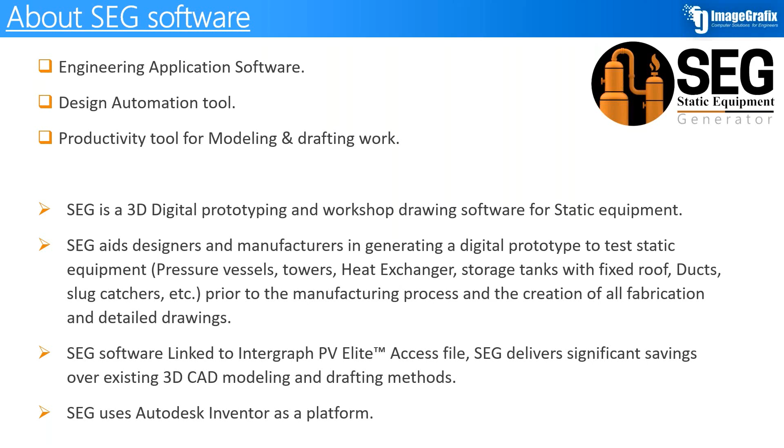By using SEG software, you have the ability to create many different types of equipment, like horizontal, sloped and vertical pressure vessels, columns with multiple sections and different diameters, storage tanks with a fixed roof, TEMA heat exchangers, piping, ducts, and slug catchers.

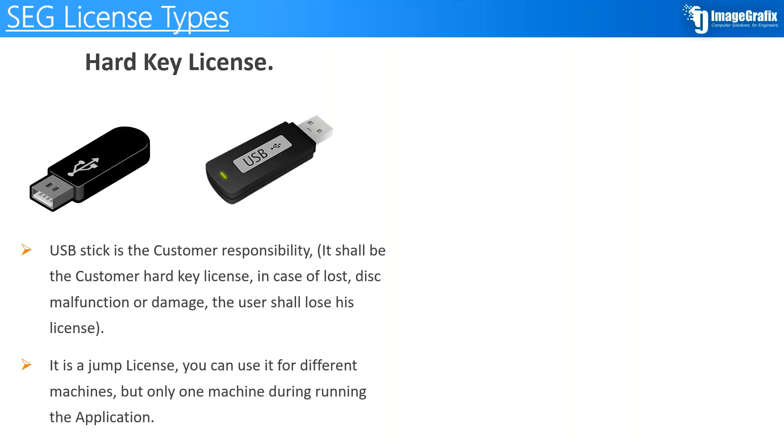SEG license types. SEG license is available in 2 types. The first type is the hard key license. By using a USB stick, you will connect it to your machine and you will be able to run SEG software. The advantage of this type of license is that it's a jump license. So that means you can move it from one machine to another, but only one machine while running the SEG application.

The second type of license is the internet license. In this type of license, the user should be connected to the internet all the time while running SEG software. It depends on the machine and some information of the user, like username and password. This type of license is a standalone license. You cannot move it from one machine to another unless you send a request to change the machine.

Today's topic: we will discuss some important points regarding the advanced assembly, or the project assembly, for multi-vessels. And for this demo, we will create a stacked heat exchanger and create a general arrangement drawing with multi-sheets for this stacked heat exchanger.

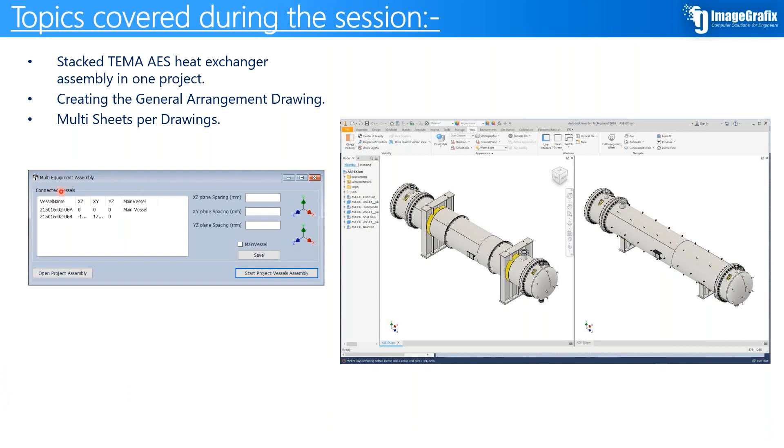By using this tool, which is the project assembly, we will make the assembly for both of those heat exchangers. And we will know how to specify the spacing between the main planes of the project to get the final assembly of both heat exchangers automatically. After that, we will proceed to create the general arrangement drawing with multi-sheets. Okay, so you have the ability to generate a drawing with multi-sheets.

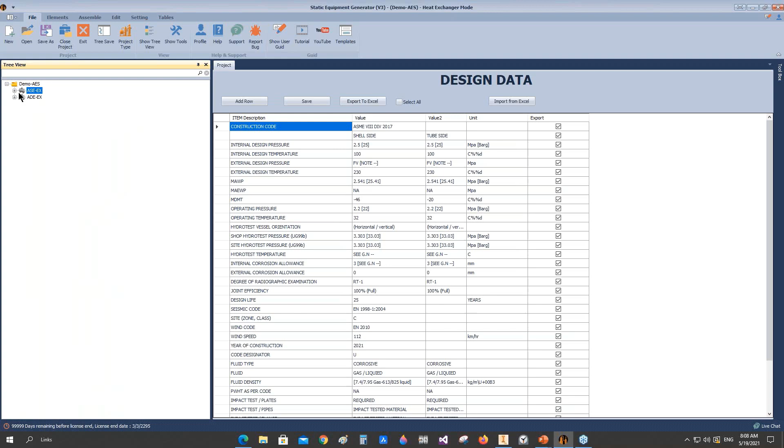Let's open SEG Software. And here you can see that in this project we have two pressure vessels, or two heat exchangers. The first one, as you can see, includes front end, tube bundle, shell side, and rear end. The second heat exchanger includes the same. Now, if we open Autodesk Inventor here, you can see that we have two separate heat exchangers. Each one of those is created by SEG Software.

And if we take a section view here of this exchanger, you can see that all details appear here, like the internal impingement baffle, tubes, tube sheet holes, pass partition, all of that.

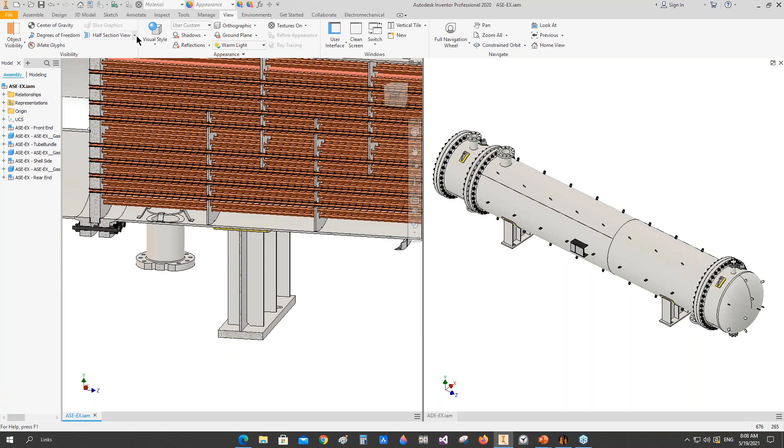Okay, now we will make the main assembly for both of those exchangers. So from the project node, here we have three different nodes. The first level is the project level. After that, the equipment level. And each equipment of those includes other nodes for each element.

Now we will select the project node, and by right-clicking on this node, we will get this shortcut menu. From it, we will select project assembly. Now we have this form for project assembly. This form gives you the ability to create an assembly for your project equipment. The first equipment here, which is mentioned on the tree, we will define it as the main vessel. After that, we will save the information.

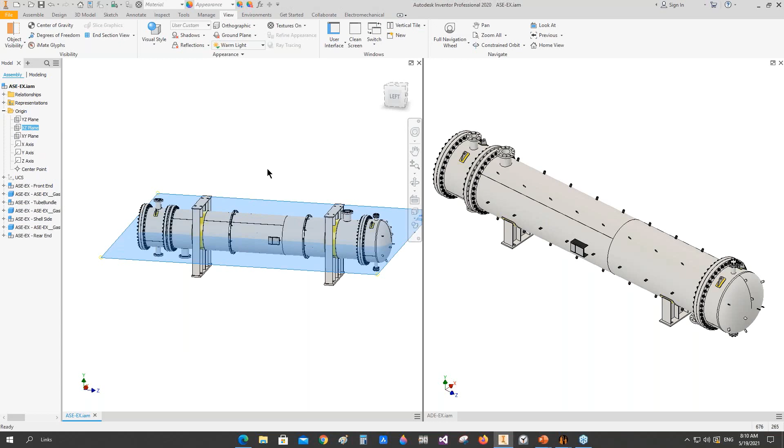For the second vessel, we will define the spacing between them. So what is the spacing between the elements here? If we take a look at the origin planes of the first equipment, you can figure that that's the main origin plane, which is the XZ plane. We take a look from the front view. You can figure that this plane divides the exchanger from the center line. The same for the second exchanger.

If we come here and select the XZ plane, to define the XZ plane spacing, we will define the spacing between them. So this heat exchanger will be above that one with the defined space here. No shifting on the YZ or XY plane, so we will keep those values at 0.

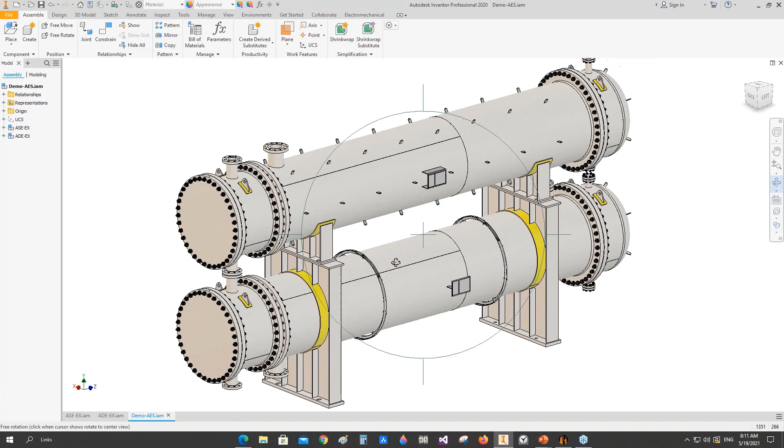After that, we will start the project. And in this case, we already generated the 3D model of the equipment. So we will open the 3D model of the heat exchanger. Now we have the final assembly of both heat exchangers. And you can figure that that's the assembly name.

And now we will check the bill of material of this heat exchanger here. On clicking on the bill of material, you can figure that we have 90 elements. And by changing an option here in the app settings, this option, which is bill of material grouping, gives you the ability to make a summation of the identical items in both equipments or in all equipments in your project. If you would like to divide each equipment with a separate bill of material, you will remove this checkbox.

Let's try this. Now, if we remove this checkbox, make the sort numbering like this and click Save, if we come back to the tables and open the bill of material table and come down right here, you can figure that we have 138 elements. Okay, that means by removing the summation of elements, you will separate the bill of material of each equipment in the final bill of material of your project.

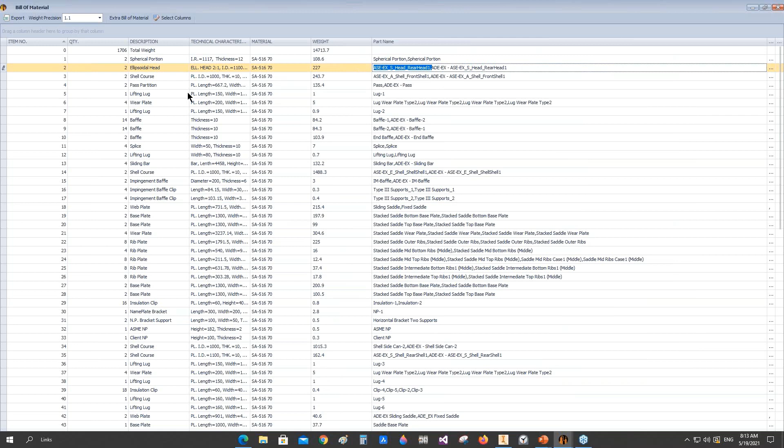Let's come back here, select group by overall project and sort numbering, and click Save. Now, if we come back to the table, you can figure that for the ellipsoidal heads, we now have two ellipsoidal heads for the top and the bottom heat exchanger, and you can figure that here, that's the second heat exchanger and that's the first heat exchanger. So if we come back down here, you can figure the total number of elements here.

Now let's start creating the general arrangement drawing for this project. So from here we will click on drawing. We will select the project node. After that, select drawing and select create drawing. From this wizard, we will select the drawing size. Let's select A1. That's the format of the drawing.

And from the orientation, you have the ability to change the orientation of the drawing from portrait to landscape, and change the location of the title block to the bottom right-hand side, bottom left-hand side or top. So select the border location and the title block location. And from the active views, we will select the number of views that will appear on the general arrangement drawing. We will select the right side and define the spacing between the elevation view and the right view.

And from the view orientation, we will select the left view. So if we come here and take a look at the left view, we will make this view as the elevation. Okay, so we will look at the left view, and from style, if you would like to make it with hidden lines, select this style, and if you would like to make it with visible lines only without any hidden lines, we will select this option.

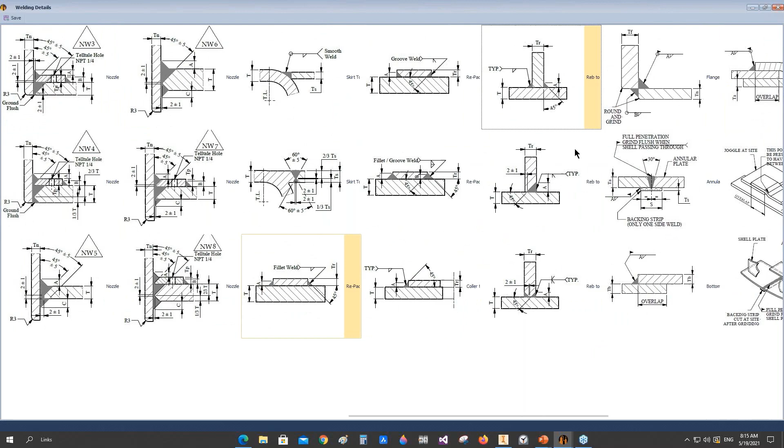Regarding the welding details, if you would like to remove or add other welding details, just select the required welding details from the welding detail library and click Save. Now we will add the client document list and vessel document list. From here, we will define the revision table, revision 0. Okay, checked, approved by. And if you would like to add some empty rows here.

And in this step, we will define the number of sheets required in this drawing. From here, in case you select design one, you will have only one sheet, which is the main sheet, which is A1 size format. But if we select design 2, you have the ability to have two different sheets in your main drawing. We will make the second sheet with size A3, and in this case, you have the ability to move some tables, some information to another sheet.

In this case, we will move the bill of material to the second sheet, because it's a little bit huge, so it will make noise on the general arrangement. So we will separate it in a separate sheet. Now, by clicking on Create Drawing, and if we come back here,

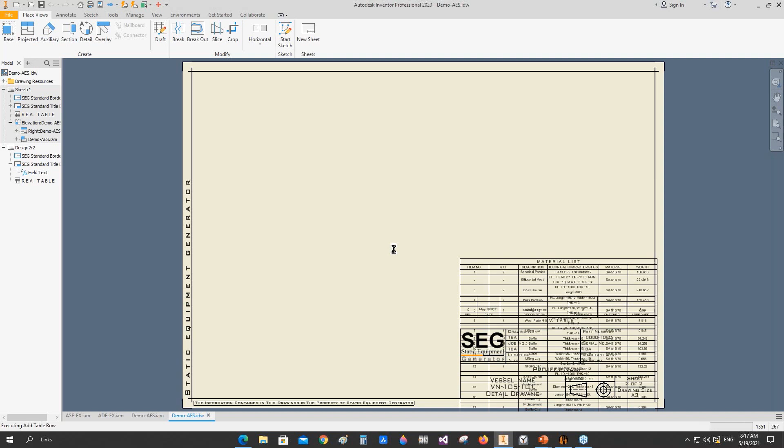okay, now if you take a look at the Model tab, you can figure that we have Sheet 1 and Sheet 2. In the second sheet, you can figure that we have the bill of material. Now it's created, just the information shall fill the table. After that, it will take place automatically. Here, that's the bill of material. Now the table is filled. After that, it will be adjusted automatically in the correct place.

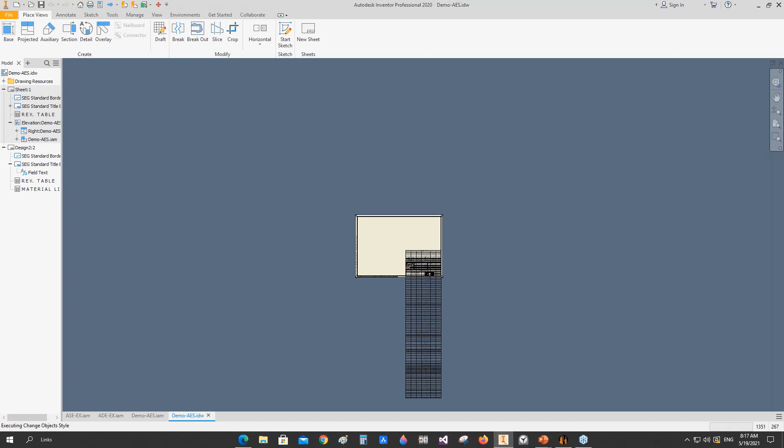After that, you can make a modification on the location and the row width if you would like to change the row width of the table or the location of the table in the drawing. Now the location is modified. Let's come back to sheet 1.

Here, that's sheet 1. Here we have the revision table, the notes, the nozzle table, the client document list, vessel document list, and the main 2 views of the vessel. Now the welding details will be added to the general arrangement drawing.

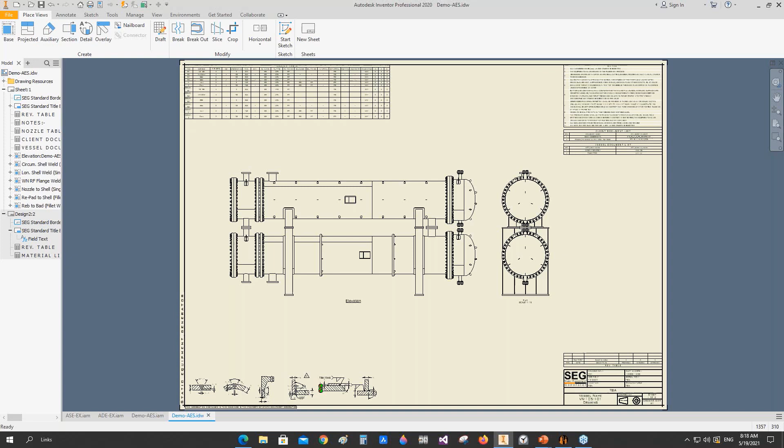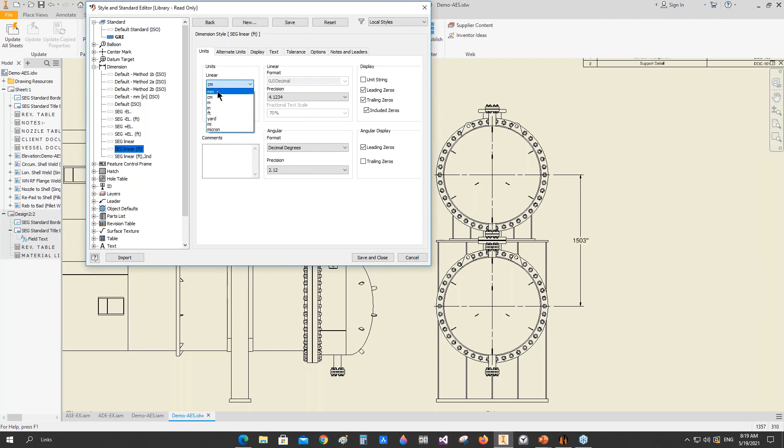Okay, now as you can figure, we have the 2 equipments, and if you would like to define some dimensions like the spacing or the gap between them, here this drawing source file is in inches, so we will modify it. So let's come back to the drawing source file and select that one to modify it to millimeter. Okay, so the value is in millimeter.

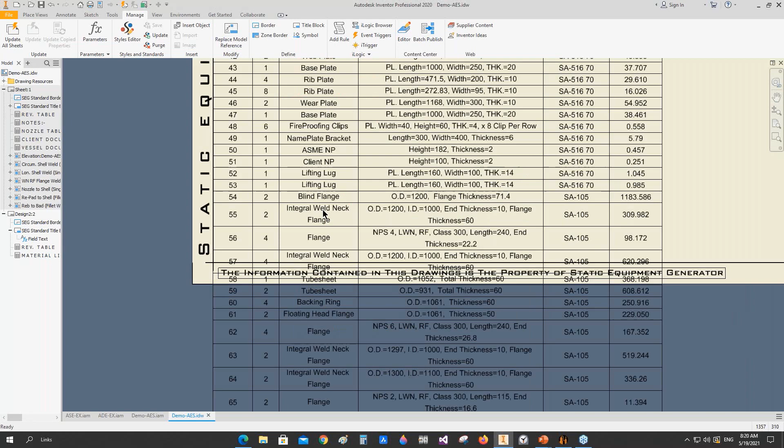Now let's come back to sheet number 2 to modify the bill of material. If we double click on the bill of material, let's modify the arrangement of the heading, let's make it on top, and the sorting from top to bottom, and click OK. And let's move the bill of material right here. And now we can make a split to this table, like this. And let's change the width of the row a little bit. Okay, now we have the bill of material of the total equipment like this.

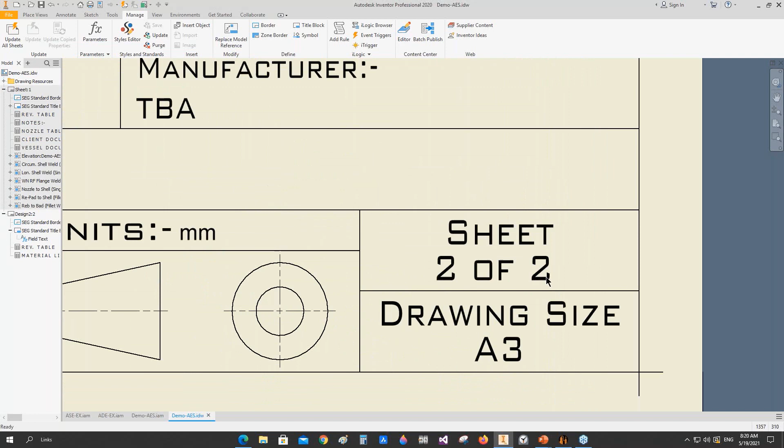By this way, you can separate the bill of material or any other table in a separate sheet in the same drawing. So you can figure that you have 2 sheets, sheet 1 of 2 and sheet 2 of 2. Okay. Now we will make another live demo. So let's close this project and open another project.

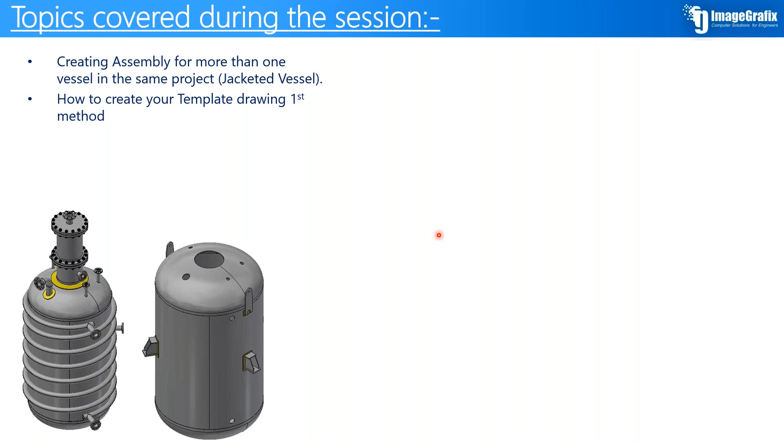In the second demo, we will make an assembly for a jacketed vessel, which includes an internal vessel and an external vessel. The internal vessel includes a coil, and the external vessel shall include other attachments for fixing and lifting. So by using the project assembly tool, we will make the final assembly for all the equipment.

And in this step, we will learn how to make your standard template drawing for your company, and how you have the ability to import it in SEG to use it as a reference drawing. Okay, we have two different ways. That's the first way, and we will discuss it.

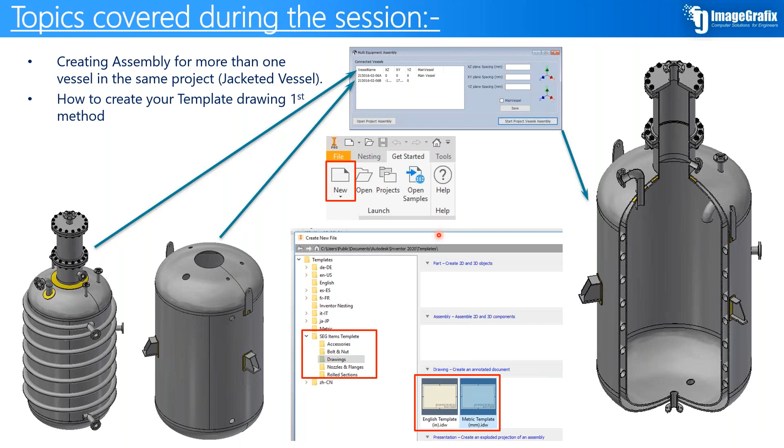The second way, we will discuss it in this live demo: how you can add your title block and your border, how to add the style in a correct way, and how you have the ability to import your standard title block in the SEG library to use it in your drawing.

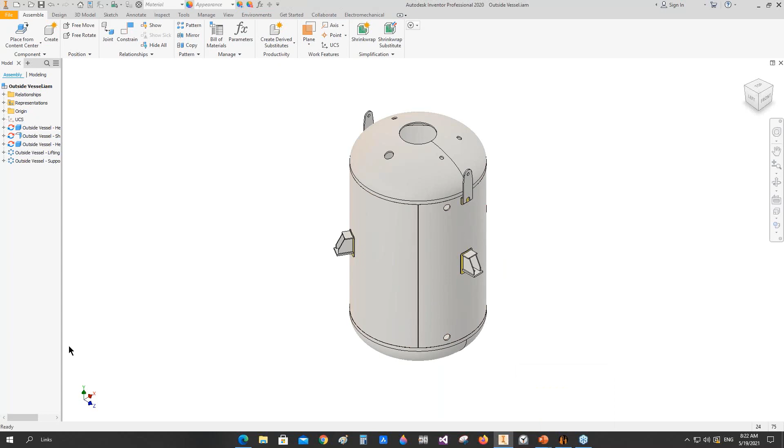Okay, now let's come back to the project, and let's open the jacketed vessel. Now we have the inside vessel, that one. Okay, and that's the outside vessel. And by using the project assembly tool, we will open or generate the final assembly for both of those equipments.

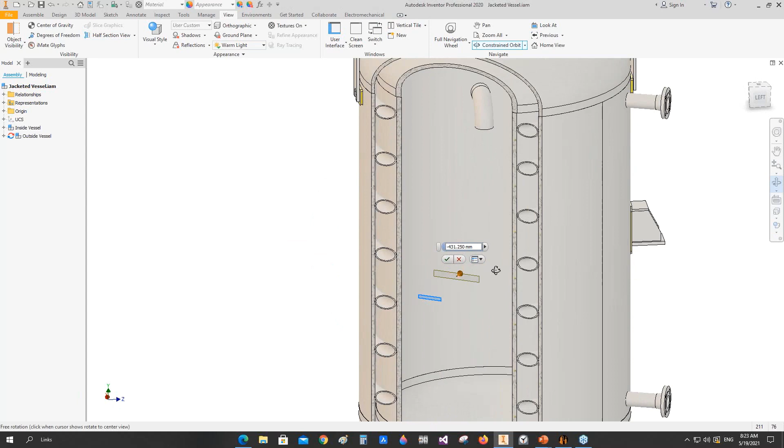Let's take a section. So both of those equipments, like that. Okay, now we will learn how to create your reference template drawing by the first way.

We will open a new tab, and from here you can see that you have the SEG item template. If you open it, you will find drawings. If you select it, you will find the metric template and the English template. If we select the metric template, for example, from here, let's delete the default border and title block, and let's define

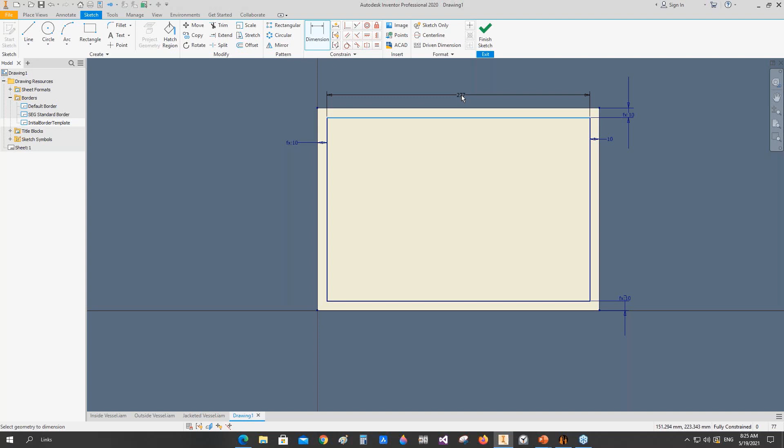our new border. So from define the border, let's create our new border by using this tool, and let's define the spacing. Okay, so that's the border. Don't constrain the length of this one, because it changes with the sheet size. So if you select A3 or A2 or A1, this value is flexible.

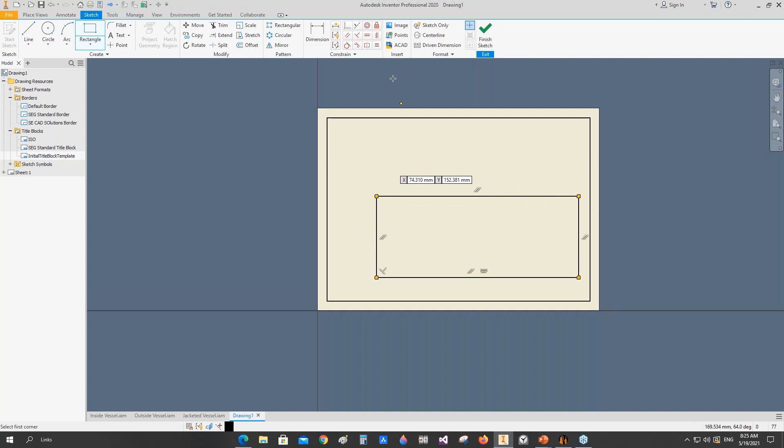Don't constrain it. Now we will save this border as SE CAD Solutions border, and let's import it to the drawing. And from the title block, we will add a new title block. So let's keep this title block. Let's define the length, the height, and let's add some information.

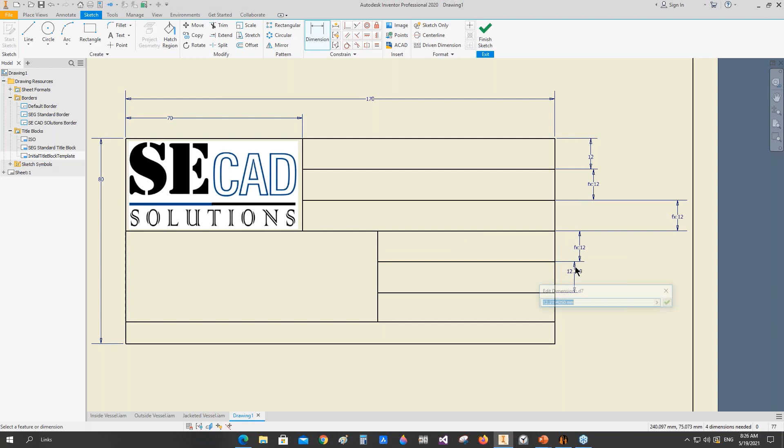And let's add an image. Okay, so from here, okay, let's add... And let's make the drawing number at the bottom here.

Okay, let's click OK. From the properties, we have some custom information for the drawing, like the client drawing number, drawing name, job number, location, manufacturer. All of those data shall be sent from SEG software to the reference drawing.

So if you would like to add a drawing number here and reflect it automatically, we will double click here, and from here we will select a custom property, select the drawing number and import it like that. Let's save this as SE CAD Solutions title block.

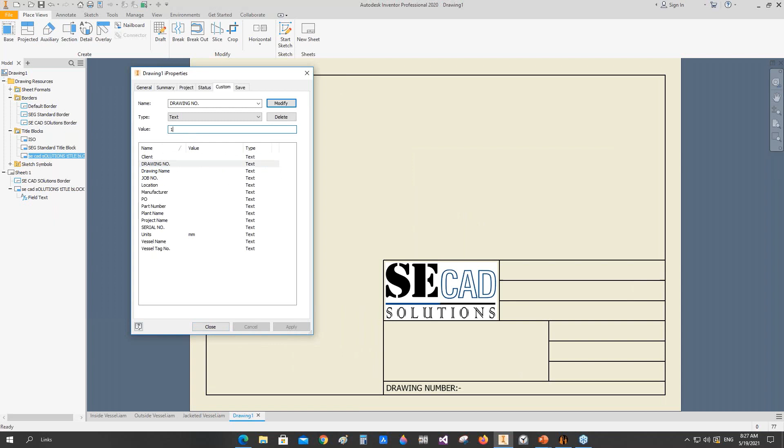Insert. Now, anytime you change the drawing number, for example, if you change it and click OK, the drawing number will be changed automatically. So by using the custom properties, you have the ability to fill all data in your title block automatically.

Now we will save this title block, or this drawing, as a reference drawing to use it in our sample of today. If we click on save, you can see that you don't have the ability to save this item because SEG takes control from Autodesk Inventor. Now we will click on Save Active Document, and from here we will select this drawing as a reference drawing, and let's save it here.

Okay, let's click to append. Now this border is defined in SEG, and to be able to use it, you should set it as default. Each time SEG creates a new drawing, you will automatically get this reference drawing to use.

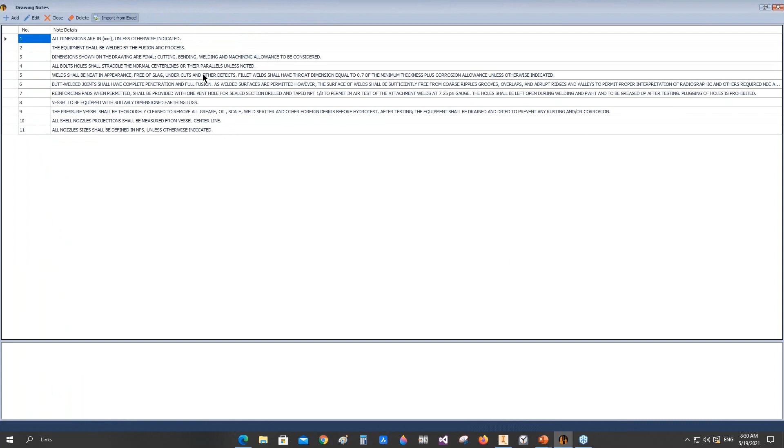For tables, we will select the bill of material table, nozzle table, and for notes we will add external notes. We have a file that includes the notes, so we will import it. After clicking open, SEG will ask if you would like to remove the old notes or use both. We will delete the old notes by clicking yes, and now we have the new notes for our project.

Let's click close, and from welding we will select some welding details, some more welding details like this, and click save.

Now we will select from design, choose design 2, and select the size of sheet 2. Let's make it A2, and now we will separate the notes onto a separate sheet. So we will define notes to be on the second sheet, and click save.

Now we will click on create drawing. You can see that the new border and title block, our reference drawing, is now used as a reference drawing in this project.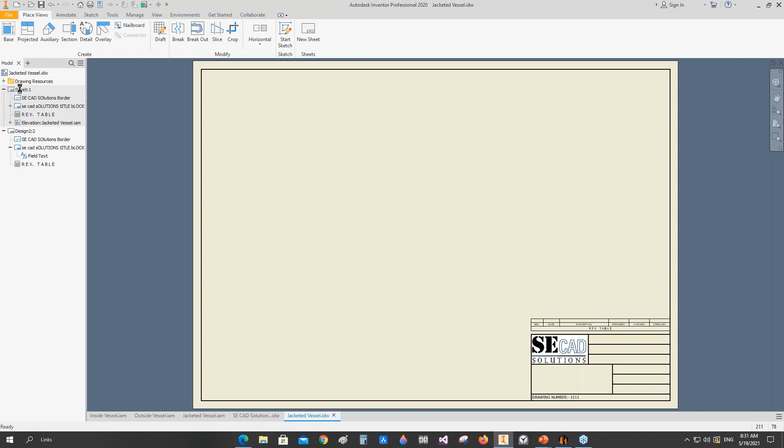If you take a look at the model tab, you will see that we have two sheets. The first sheet includes the equipment details, and the second sheet includes the notes.

In this demo, we will learn how to add other tables to our drawing, like if you would like to add manufacturing information or a welding table or something like that to your drawing, and how to add it.

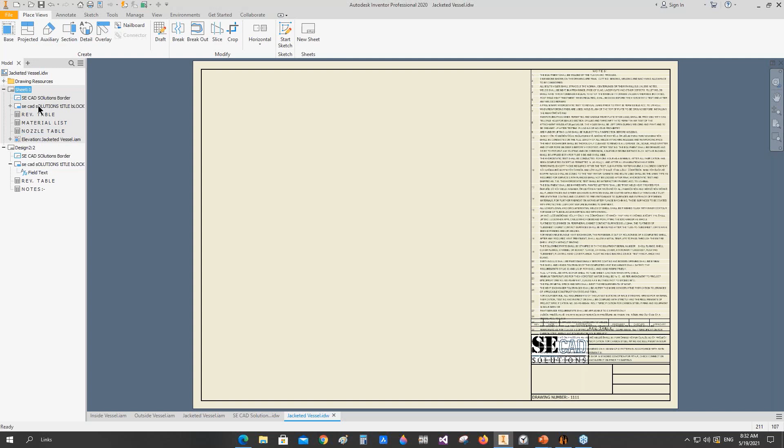Now you can see that the revision table is here, along with the bill of material, the nozzle table, and the welding details of the equipment.

Now we will add some other notes to the second sheet. We will learn how to do that.

Okay, so from annotation, we will add a general table, and let's add the procurement notes.

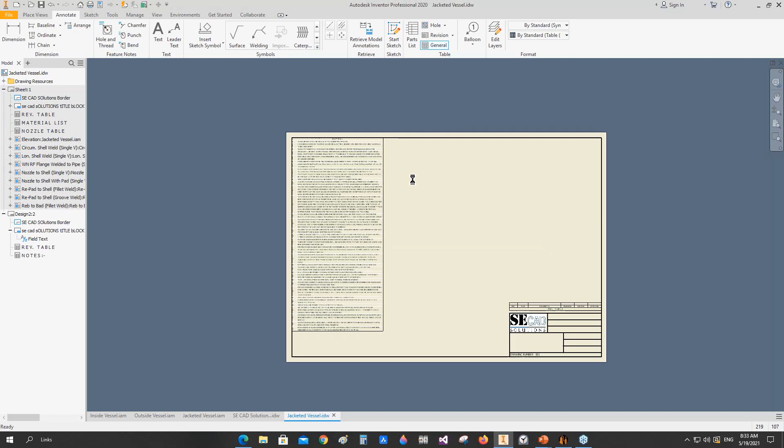Let's click on OK, and let's add it right here. From here, we will select the style to be as a notes, and let's define the width of each column.

And the heading of the table. Let's add another note, which is the manufacturing notes.

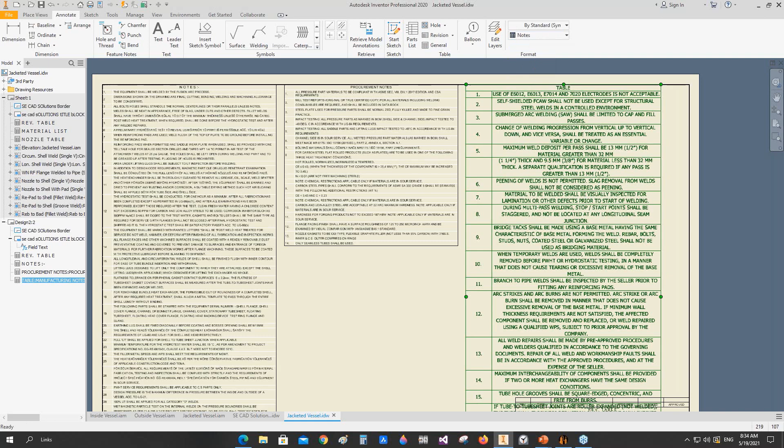By that way, you have the ability to add many different tables to your drawing in an easy way, and you have the ability to move tables anywhere in your drawing.

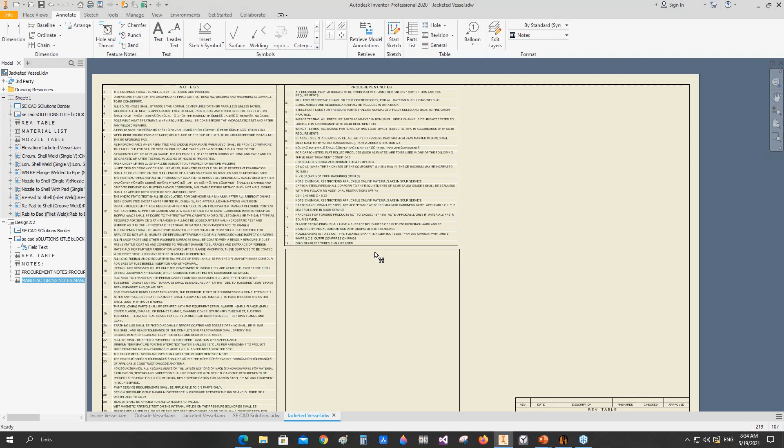So in this demo, we create the assembly of the jacketed vessel and create the general arrangement drawing of this one, which includes two sheets. The first sheet includes the general arrangement drawing of the equipment, and let's take a section on this one, like this.

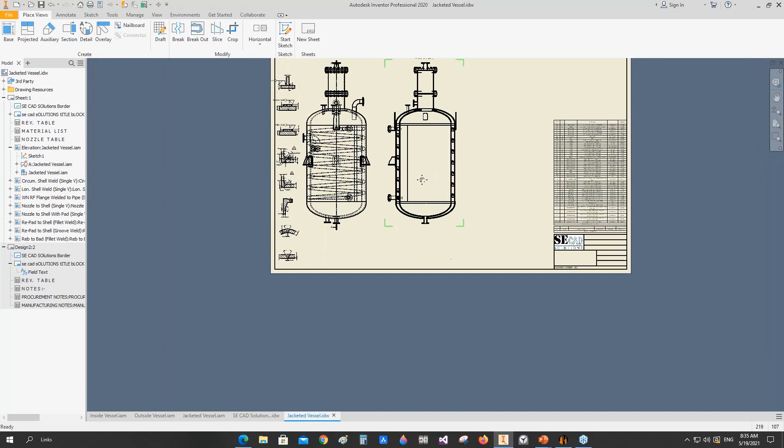And if you would like to add a top view, like this, move it, and break the relation between it and the main view, like this. So you have the ability to add views like this.

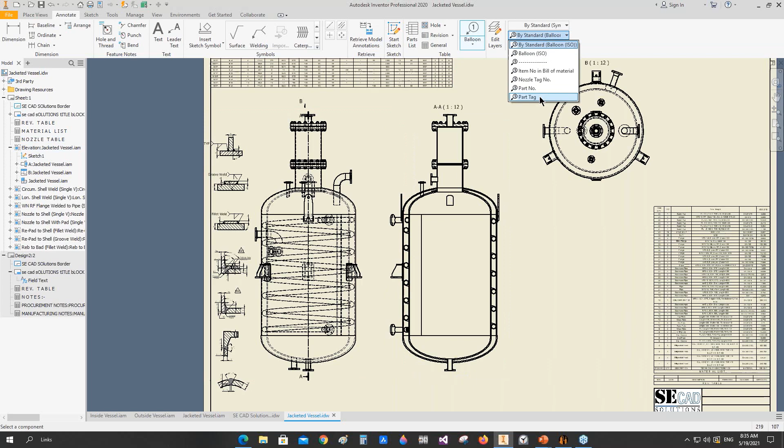After that, you have the ability to add some dimensions to your model and add some annotations like nozzle tag, for example, if you would like to define this nozzle name.

Okay, and after adding your dimensions to your drawing, you will be able to create the final drawing of your equipment. Okay, we have another sample.

For the next sample, let's open it first. In this sample, we will create the general arrangement drawing with all details, with dimensions, and we will export it.

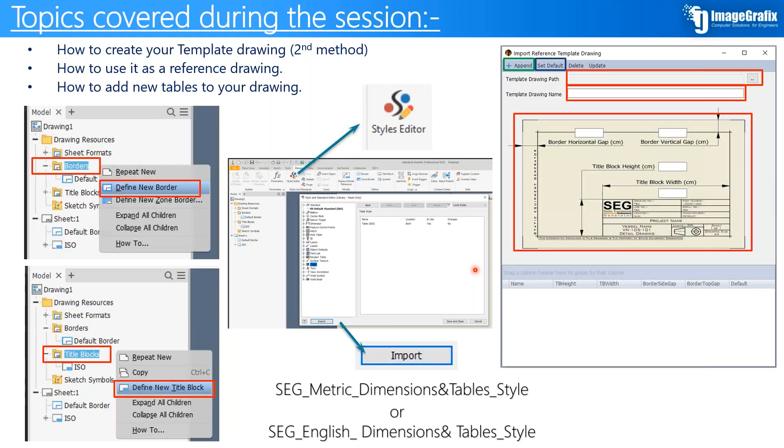To many different extensions. So in this demo, we will learn how to change the drawing units from millimeter to inches, and how to change the nozzle size from NPS to DN if you would like to change it on the nozzle table.

And how to update your tables and the welding tips. Sometimes you will add some elements or nozzles to your model, and if you would like to update the tables in your drawing, how you can do that.

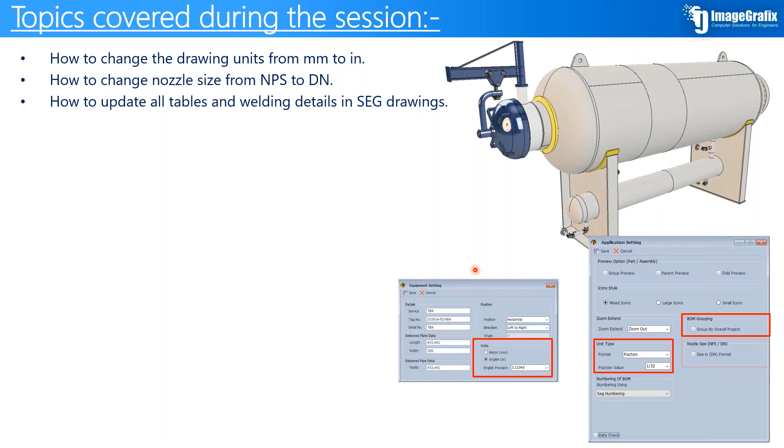In this sample model, from the equipment setting, we will learn how to change the units, and from the app setting, how to change the unit type from decimal to fraction and select the fraction value, how to make a group for the bill of material, how to change the size of the nozzle from NPS to DN, and how to make a sort numbering.

After that, we will know how to generate the general arrangement. So in this demo, we will generate the complete equipment general arrangement drawing by using SEG software in minutes. So let's come back to our model here and open the project assembly.

Here we have this equipment, and we will start creating the general arrangement drawing for this equipment.

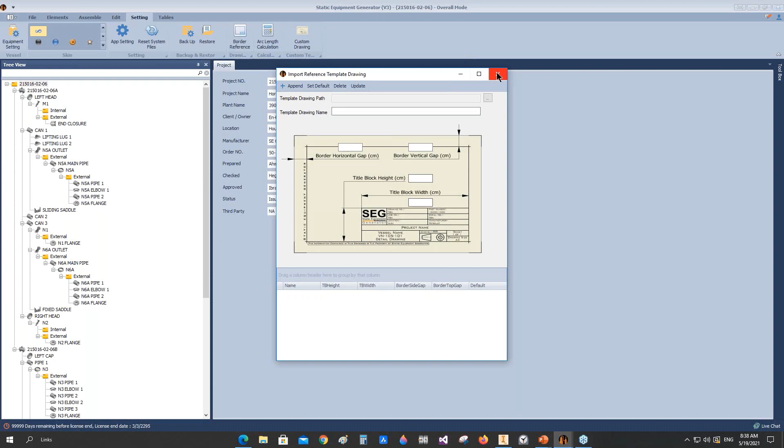Before that, let's select a border with inches, the standard border in SEG. If you would like to use the SEG title block and border in English units, we need first to remove this template from the library, because it's defined here as a default. So we will delete it to be able to use the standard reference drawing like that.

From here we will create our drawing and select the size of this drawing. Before this step, let's check the units. For the equipment itself, we select English units, not metric units. If we click on app settings, you can see we select the fraction type, not the decimal, with a fraction value of 1/32. For sort numbering, we have two different types of sorting.

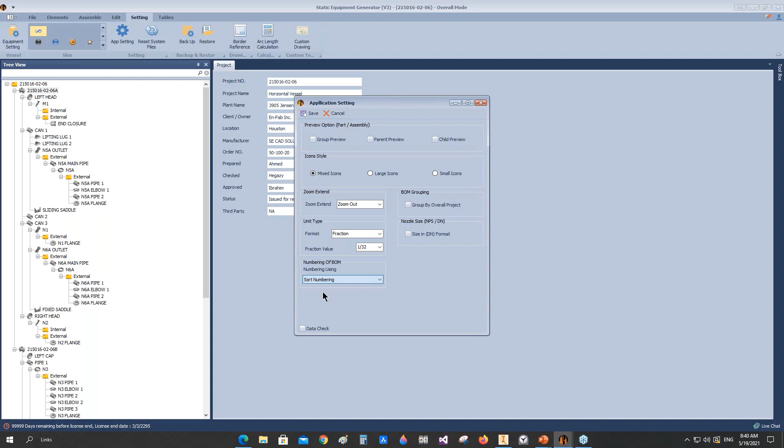If we select the SEG numbering and click save, and open the bill of material table, you can see the sort numbering is 1.1, 1.2 for the formed heads, 2.1, 2.2, 2.3 for the shell plates. After that, the numbering takes that configuration. If we change the sort numbering to be sort numbering, which is 1, 2, 3, and click save, coming back to the bill of material table, you can see the numbering comes like that, 1, 2, 3, 4.

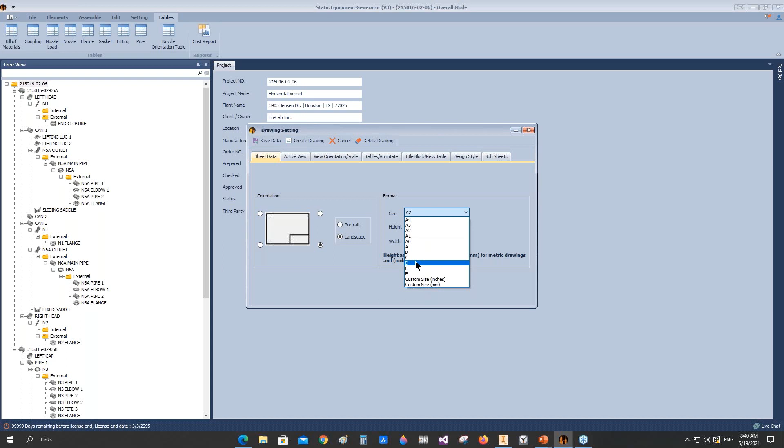Now let's start creating the general arrangement drawing of this equipment. We will right click on the project, and from the drawing tab click on create drawing, and from here select the drawing size. In this case, it's an English unit vessel, so we will select a border with English units. Let's select D size.

From the active view, we will select two views, the elevation view and the right view, and make the spacing between them 6 centimeters. From view and orientation, we will select the left view to be the elevation view, and make the style with hidden lines. From here, we will define the location of the view in the drawing and define the scale of the view in the drawing.

From tables, we will select bill of material table, flange table, nozzle table, fitting table, and from notes, as we discussed, you have the ability to add, edit or delete.

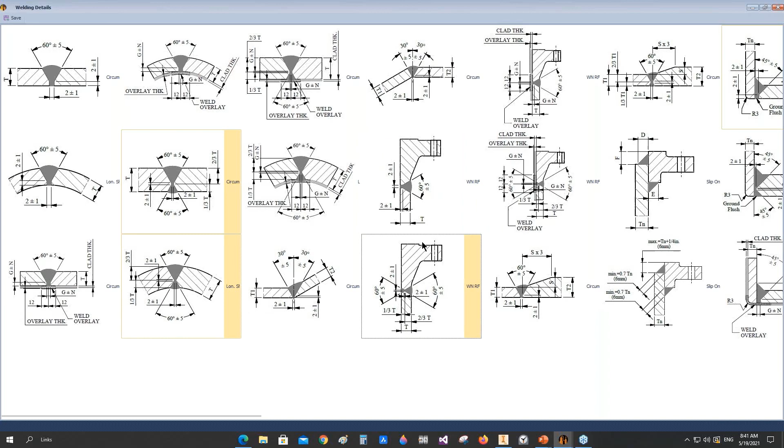For the welding details, let's select other welding details because the thickness here is a little bit more than 20 millimeters, so we will make it double V instead of single V. We will select this, and it's the same for flanges and some other attachments, the nozzles with the pad, detail for the saddle wear plate and the saddle web.

Let's click save. Let's add the client document list and the vessel document list, and from here let's edit the revision table, mark it approved, click save, and add some empty rows to the revision table.

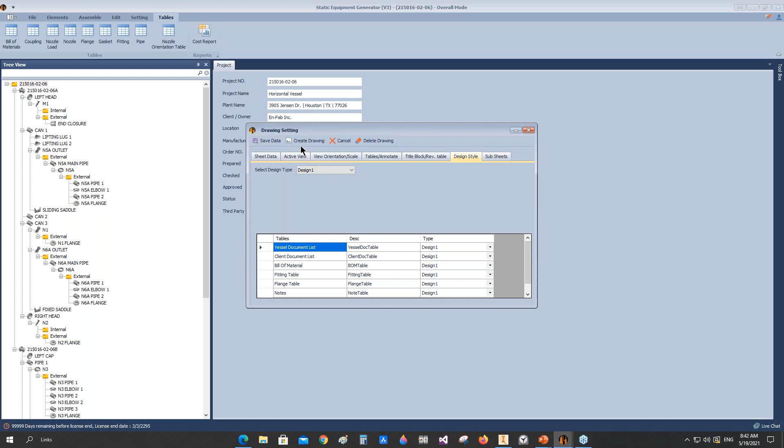From the design style, we will make all data on one sheet, and from here let's click on create drawing.

Now we will generate the general arrangement drawing for this equipment. You can see the two views appear here, the revision table, bill of material, after that the notes, the nozzle table, and now the welding details appear on the drawing.

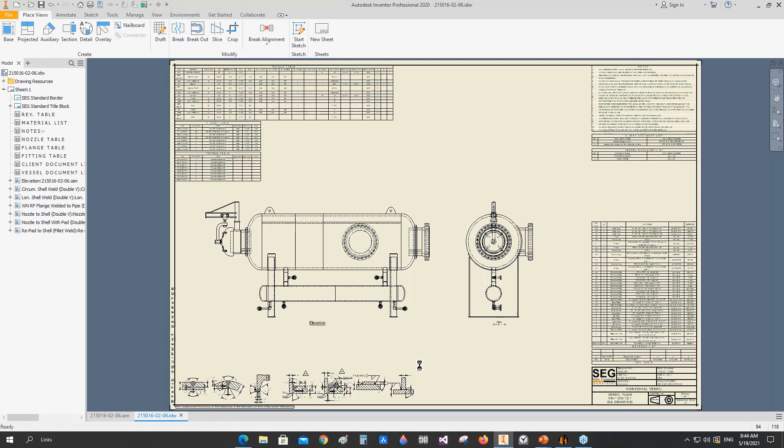Now you have the ability to move tables anywhere in your model. So if you would like to make some adjustments, like moving the flange table a little bit here and the fitting table like that. Now, if you would like to add some details like the saddle detail on your model...

We come back to the model right here, and if we open this equipment and open this saddle, we have the ability to add this saddle view. Let's take a look from the back view.

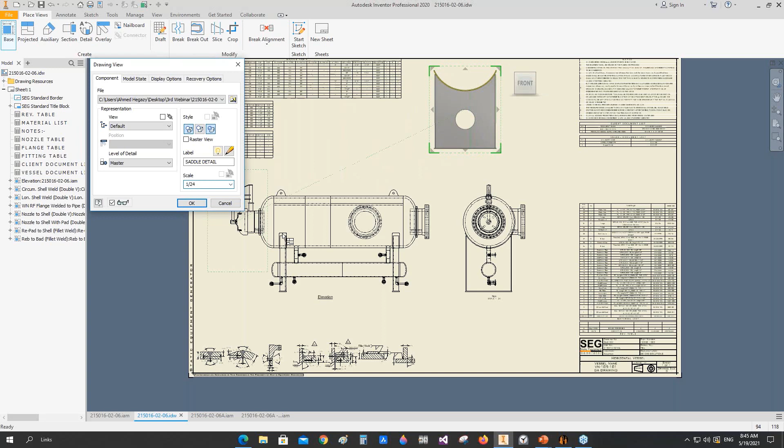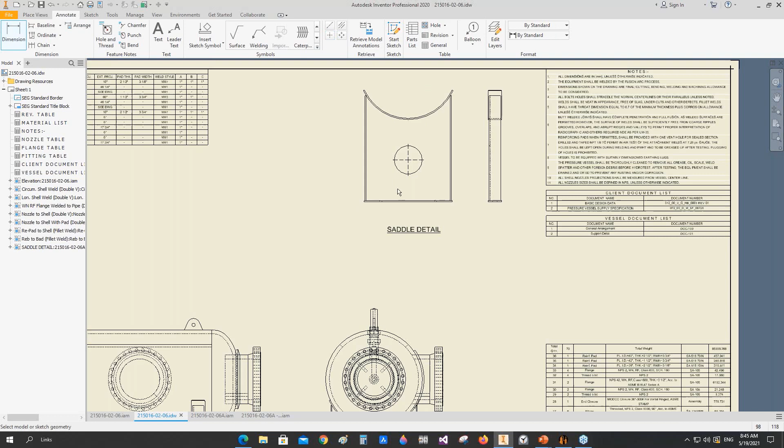Let's take another view for the saddle, and let's add some dimensions to this saddle, like the distance from here to there. And if you would like to make those values in a different format, like foot instead of inches, you have the ability to select this type of dimension, so you can figure foot, millimeter, or inches, from here to there.

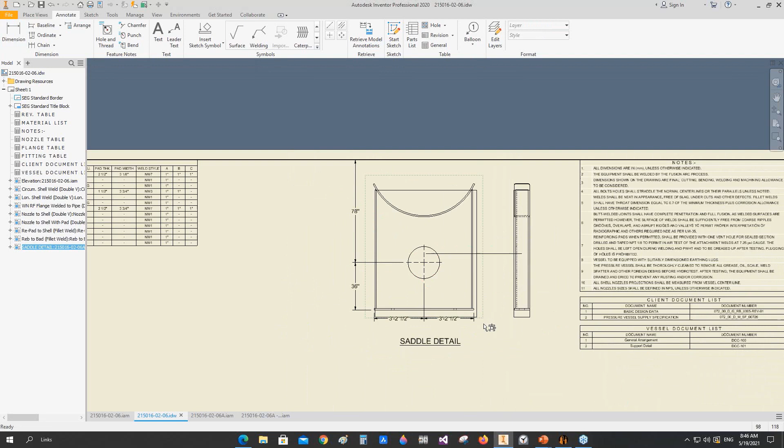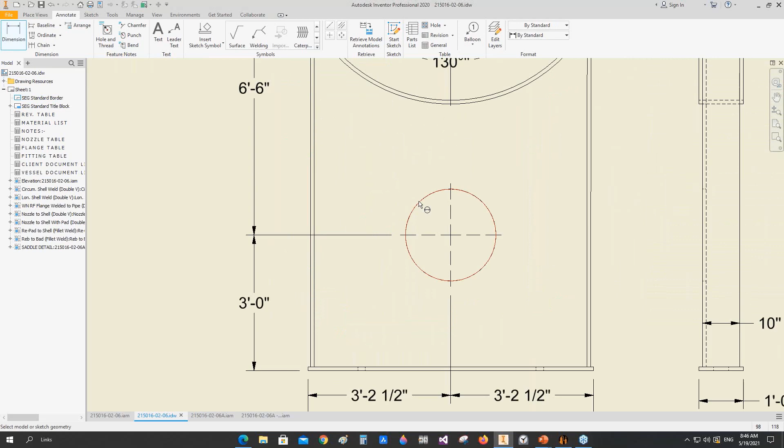Let's move this view a little bit down here, add a center line, and define the saddle wear plate angle like this, and the saddle angle like this. The total length of the base plate, the width of the base plate. To change the format of those dimensions, select them like this and move them to this style of dimension. Okay, the same for this one.

Now let's add another detail for the lifting lug. Let's come back to the 3D model and open the lifting lug. We have this one, let's take a look from the left view. Let's come back to the model, select the left view, and move this detail to be right here. That's the lifting lug, and let's define the scale 1:10, and make it without shading.

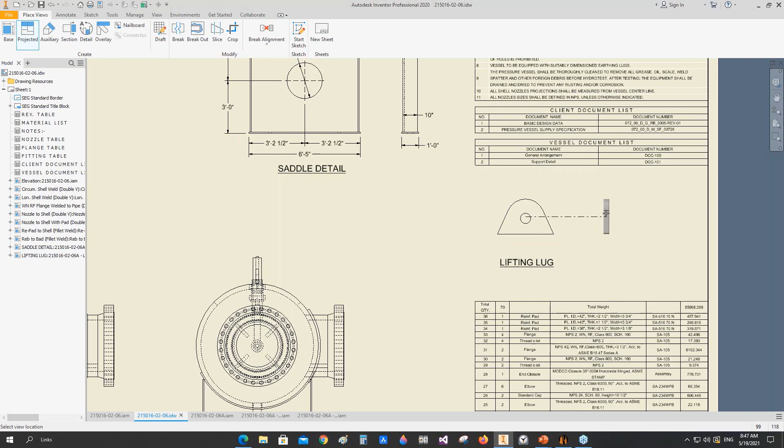Now we have this detail for the lifting lug, and if you would like to make another view like this one, let's add a center line. Let's add some dimensions like the outside diameter, pinhole diameter, the hole offset, bottom facing, and this edge if you would like to define it.

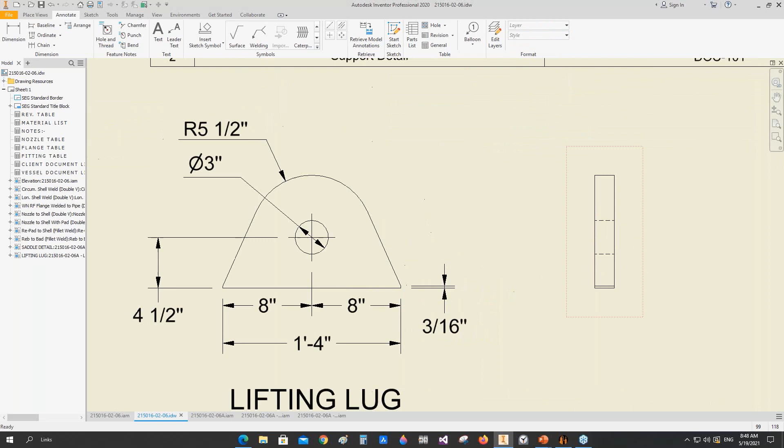Let's select this dimension and change the style of this one. And if you would like to add a welding detail, like to inform the welders to make a groove weld from that side and from the other side, like that, from the two sides, you can add a welding detail for this one like that.

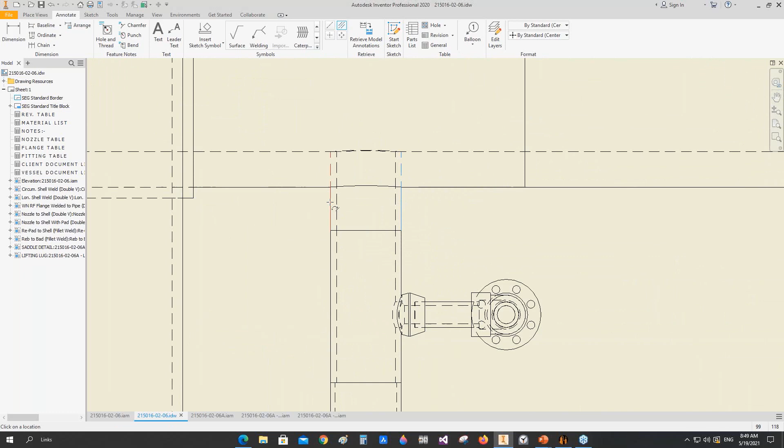Now let's add some dimensions to the model of the equipment. Let's add the center lines for the nozzles and assemblies. Now we'll add some other center lines for those flanges.

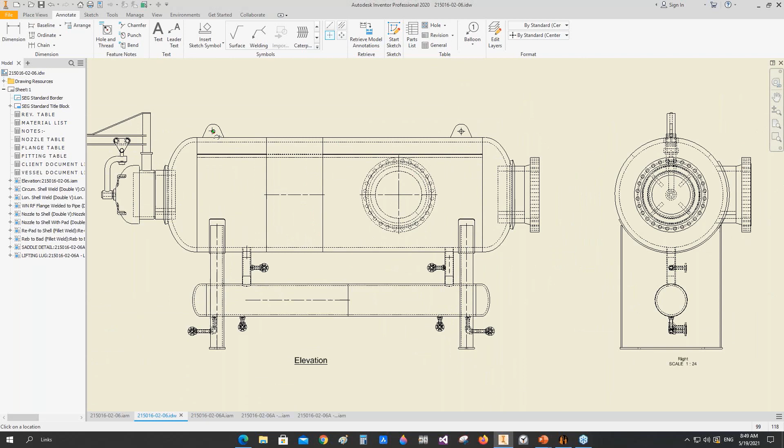And let's add some dimensions. Let's define this and add some annotations like the bill of material balloon and the nozzle balloon. Now let's add the tangent line for the ellipsoidal heads.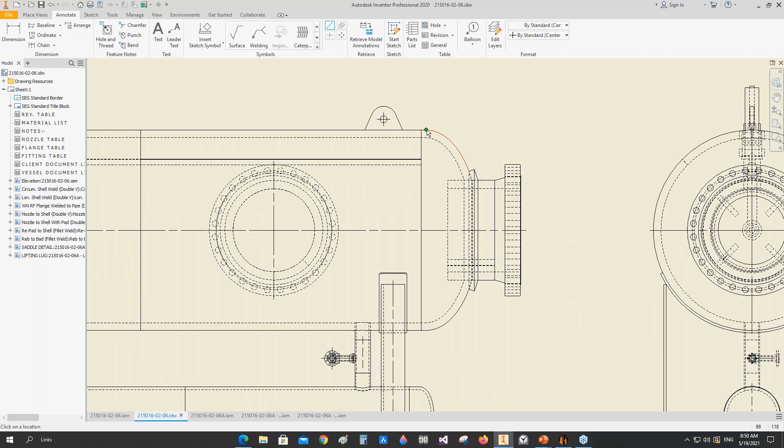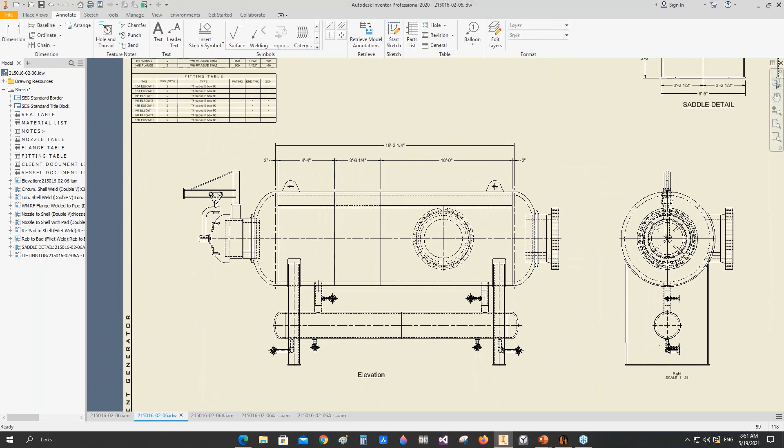So let's define the total from tan to tan, the straight flange length, the length of each course. Now let's select those dimensions and change the style of those to be in foot instead of inches. Define the inside diameter.

And let's change the style to make it vertical like this, instead of horizontal, like that. Define the length of each pipe.

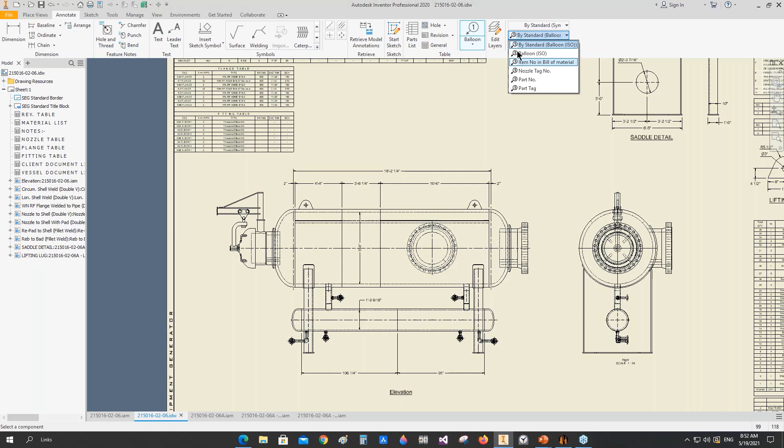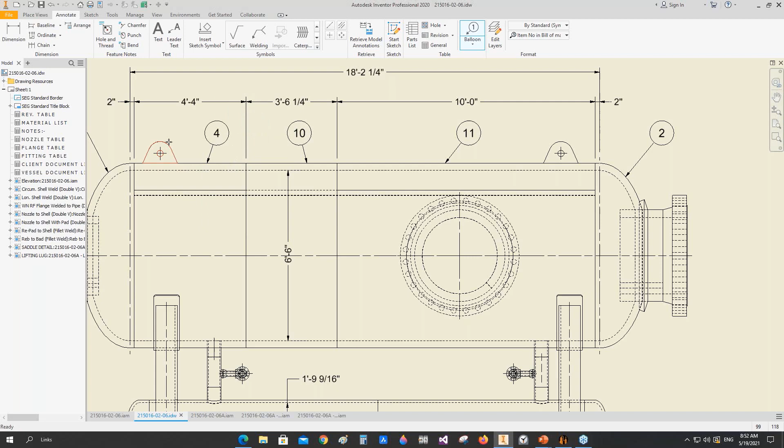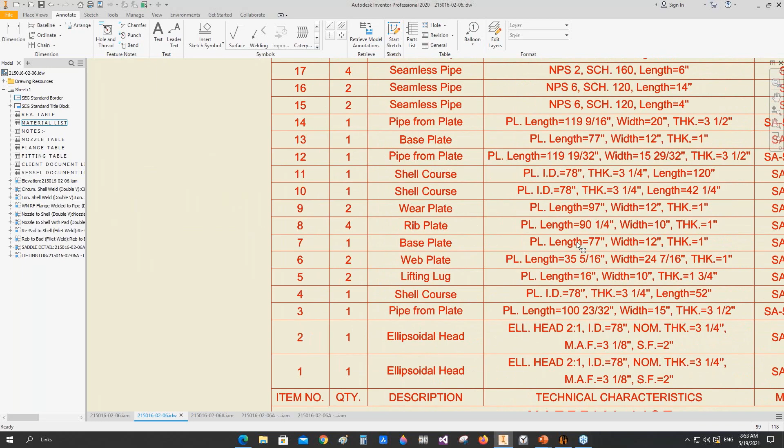So if we need to add some balloons to the saddle, we will follow the same steps, for the wear plate and the base plate. So if we would like to check that item number 7, if we come back to the bill of material, you can confirm that item number 7 is a base plate, and that's the dimension of this one, the length, width, and thickness. And you confirm that all dimensions are in inches.

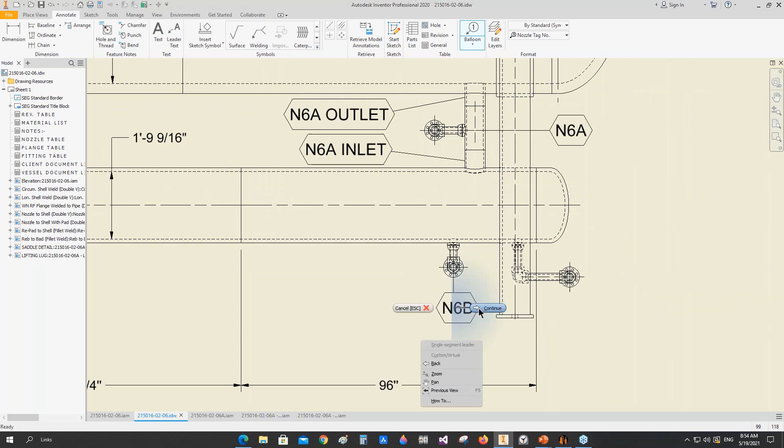Okay, now let's add some dimensions for the total gap between the two center lines. Now let's add some nozzle annotation. From balloon we will select nozzle tag, and from here we will select this nozzle. Select that nozzle, for example, that's the outlet.

And let's add the space in between the two saddles. By the same way, let's change the style. Now we have the general arrangement of the equipment.

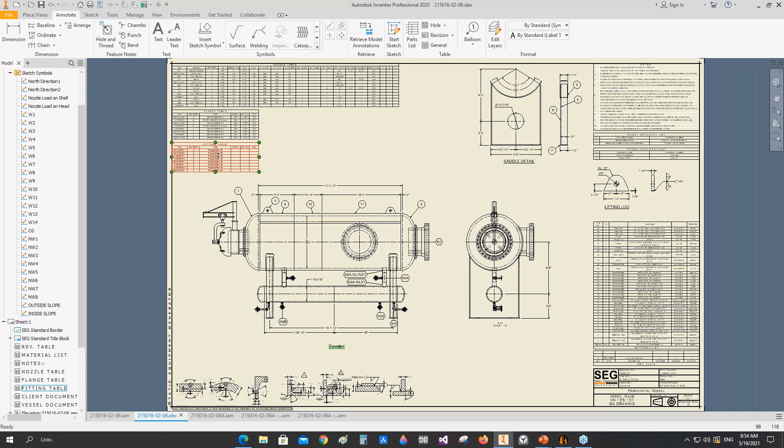Let's add some other details for the welding. Here from the sketch symbols, you will find some standard blocks in SEG, and you have the ability to add your standard blocks to the drawing. For example, let's add a top view to indicate the key plan. So let's create this, and let's change the scale. Okay, let's use this as a key plan, for example.

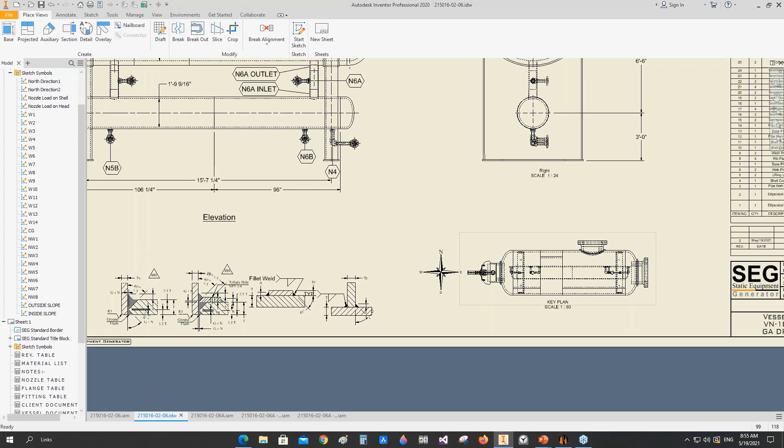And from here, let's add the north direction to this drawing. So by using the standard blocks, you have the ability to add some standard blocks from SEG. Let's add some welding details, like the longitudinal welding line orientation, the longitudinal welding line detail, circumference welding line detail, flange weld line detail. Okay.

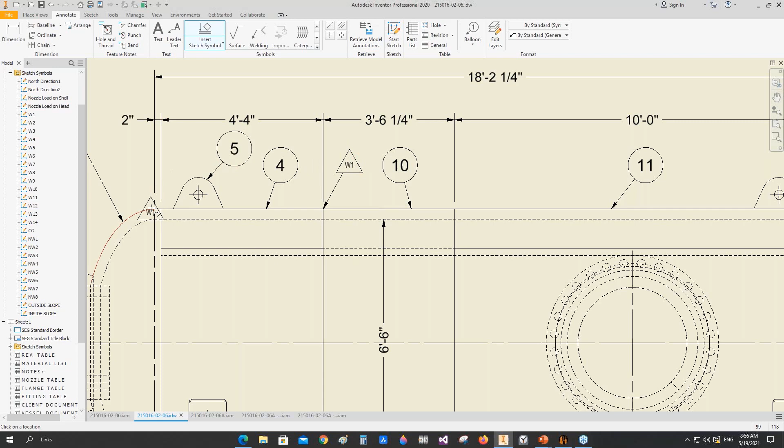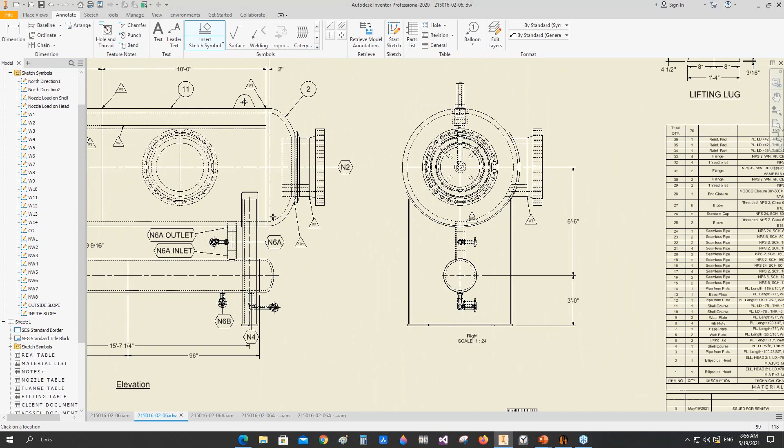And for nozzles with repad, NW4, so let's select NW4 to indicate the welding detail of the nozzle with repad, like this one. Okay, and that one.

Okay, now we have the general arrangement drawing of this equipment, and now we will know how to export the 3D model and the detailed drawings of the equipment in different formats. To export the 3D model, you will need to select any node on your tree. For example, if you would like to export the model of the project, or the vessel, or a group, or an element like the head, just select the node from the SEG tree, right-click on it and select Export to. After that, you will get many different extensions to be able to export to.

And to export your drawing, the same thing. You will select the node, and you should have a drawing for it first. And from the drawing tab, you will select Export to, like this. From this shortcut menu, you will select drawing, and from the drawing, you will select Export to be able to export this drawing. And some other features for save as and save all documents, and those features we will discuss. Here, those are the available extensions that you have the ability to export to.

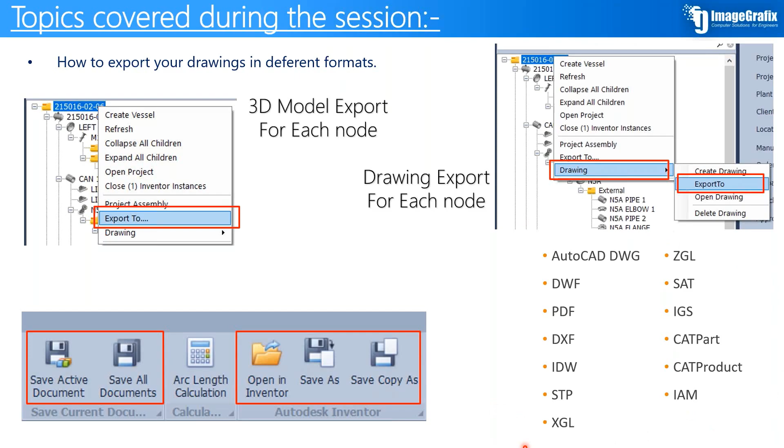Let's come back to the 3D model here. And from the SEG tab, if you would like to export the 3D model, just select the project and select Export to, and now you have the ability to select many different extensions like DWG, DWF, PDF, SAT, STP, IGES file. Let's select AutoCAD DWG, and let's export this one.

And let's open CAD to open the 3D model which we exported. Let's open AutoCAD Mechanical. And let's open the project. So from open, we will select from the desktop. Let's select the DWG. So we have this exported model. Now we have this exported model in 3D in AutoCAD or any other CAD software.

Okay. Now, how to export the drawing? So from here we will right-click, and from drawing we will select Export to, and you will find many different extensions like DWG, DXF, IDW, and PDF. Let's select PDF, and from here let's select the location, select the project, and let's name it as GA and click Save.

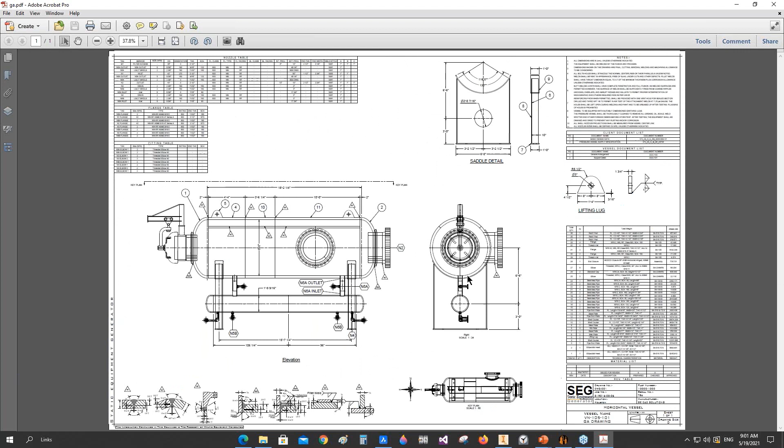Now if we open the source file here, let's wait for SEG to export the drawing. We will receive a message after exporting. Let's click OK. Now let's check the drawings that we exported. Now we have the exported drawing in PDF format, including all information, and if you would like to export it in other extensions like DWG or DXF, you have the ability to do that.

Okay. By the end of this webinar, we discussed how to create a stacked TEMA heat exchanger by using the project assembly tool, how to create an assembly for a jacketed vessel, how to select and create a template drawing and use it as a reference drawing in your model, how to change the units from millimeter to inches, how to change the nozzle size from NPS to DIN or from DIN to NPS, how to update tables and welding details in SEG drawing, how to create the template drawing and use it as a reference, and how to export your drawings in different formats.